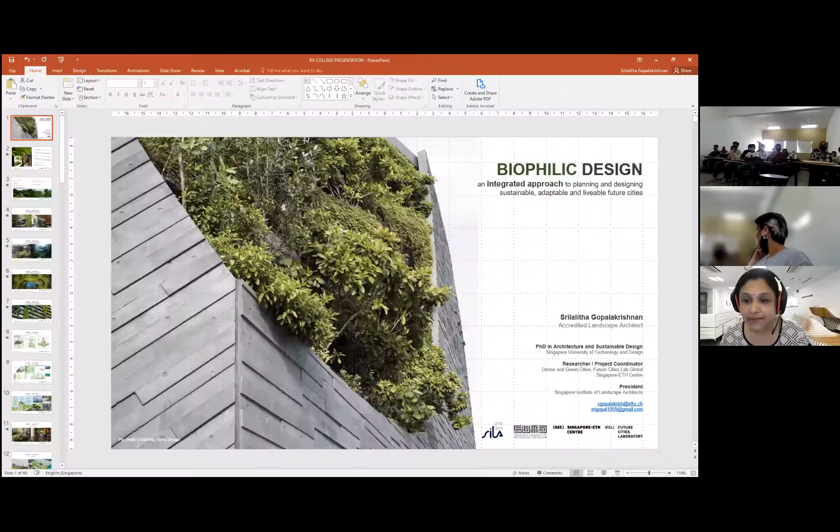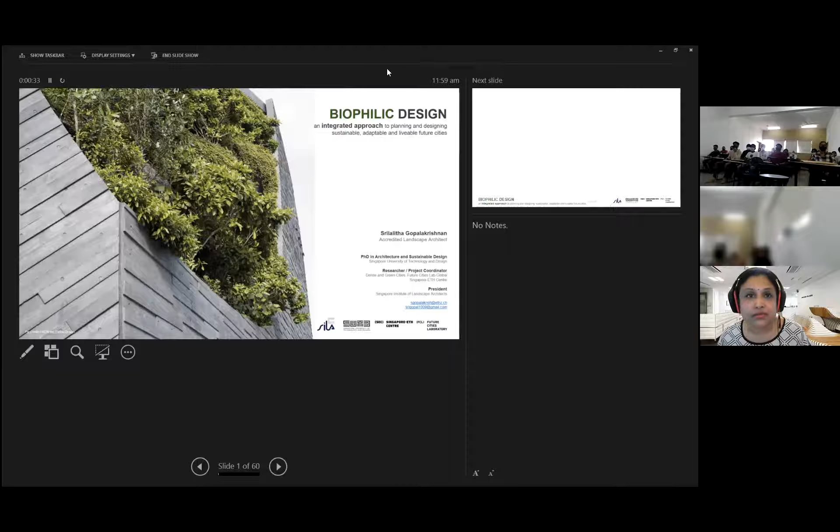Let me just start sharing my screen first and then I can continue. Can you all see my screen? Yeah, okay. So yeah, she's kind of generously introduced me. I've been doing a bit of here and there, delving into projects as well as research. So it's not a slideshow, right? It's something I can control myself, right? Yeah, it's not just a slide. But you can see the full screen on your own screen, or? We see the notes. Wait, let me change the display setting. Okay, I think I know why. It's my extended screen. Is it okay now? Yes.

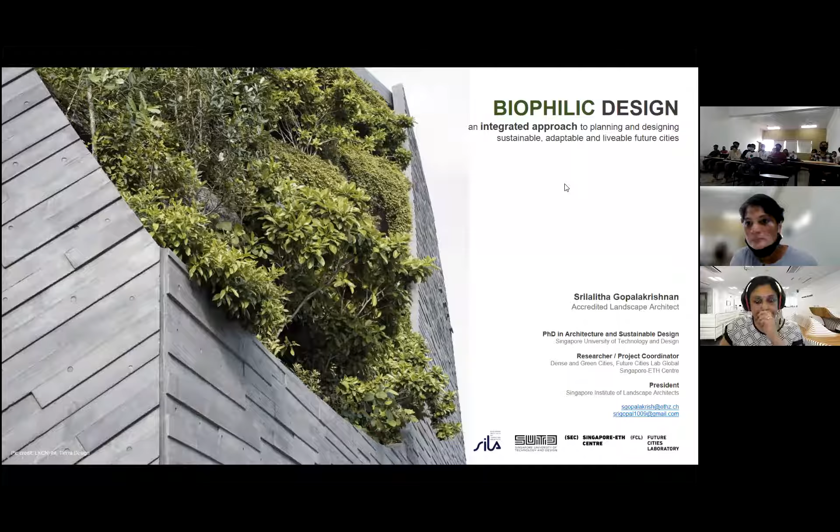Okay. So I understand from Mahalakshmi that you all are working on a design studio which is focusing on biophilic designs. The topic of biophilic design is something which I am very familiar with, and it's also something very close to where I'm practicing and where I'm settled now, which is Singapore. So today I don't plan to bore you guys with a lot of theory. My idea is to maybe just have a nice photographic journey of different projects, of what people have done, how we have approached some of these ideas of biophilic design. And I hope that you are able to get some ideas from these visuals, which could then be integrated into your own design studio problem, right?

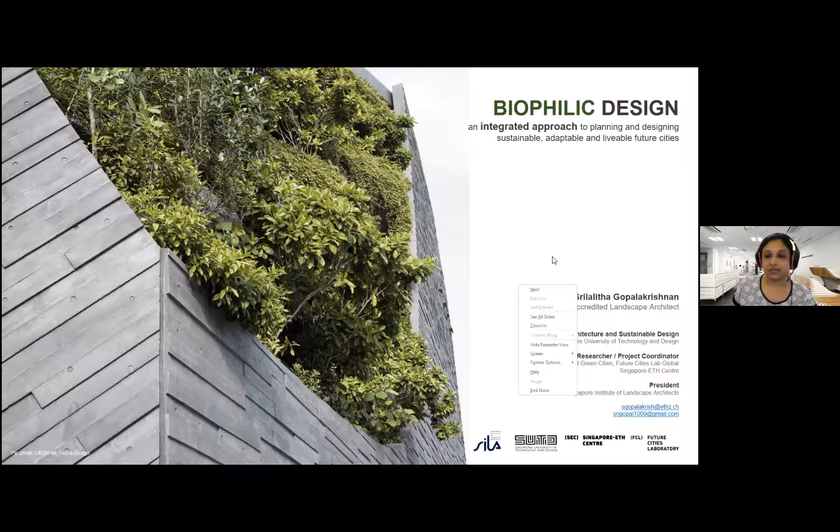Okay, so let me now get into the actual. Why isn't it moving? Okay, so I know you all must have been lectured by all your studio leads on what is biophilic design, right? So let's just do a quick recap. Biophilia in itself is a hypothesis. It's not a theory. It's a hypothesis which proposed that we humans have this very innate instinct to connect with nature, right? That became a catchphrase, and that took the form of what we now call biophilic architecture, right? So in that, what do?

We kind of integrate nature into building spaces because we know that it brings about well-being, it brings about good health, it releases stress, and there are a lot of other health benefits to it. So that's where this whole movement started, right? Like, how do you bring nature closer to your daily life?

Now, when we talk of integrating nature, what does the term integrate mean, right? Integrate means to combine things in such a way that they become more effective. If you combine and they're not effective, it's not really integration. So in integrated design, we're talking of a more holistic approach, where the design brings together many different specialities.

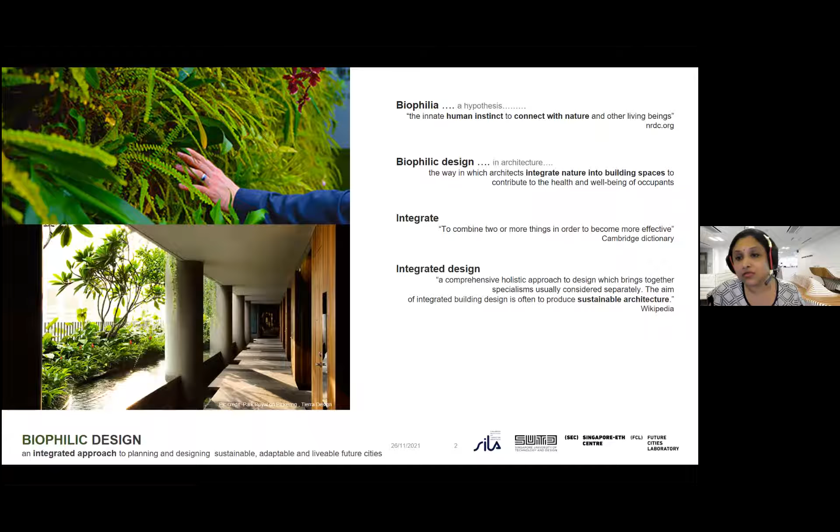And then it is able to produce something at the end of it where the sum of parts needs to be much bigger than its own parts, right? So it needs to bring about a significant change in the way the product comes to us. So in a way, we hope it becomes more sustainable, right?

So when we look at integrated design, there is, of course, intradisciplinary. That means within, say, architecture itself, you have to look at so many different aspects. Within that discipline, you have to look at many, many components which were not as important in your normal way of designing. Then there's also interdisciplinary.

That means there is knowledge which you need to leverage from other disciplines, which is not integral to architecture, right? Say it's landscape, horticulture, psychology, lighting, even bioengineering. So all these are disciplines which are not within architecture, but it's something which you have to collaborate on. So it becomes intra as well as interdisciplinary.

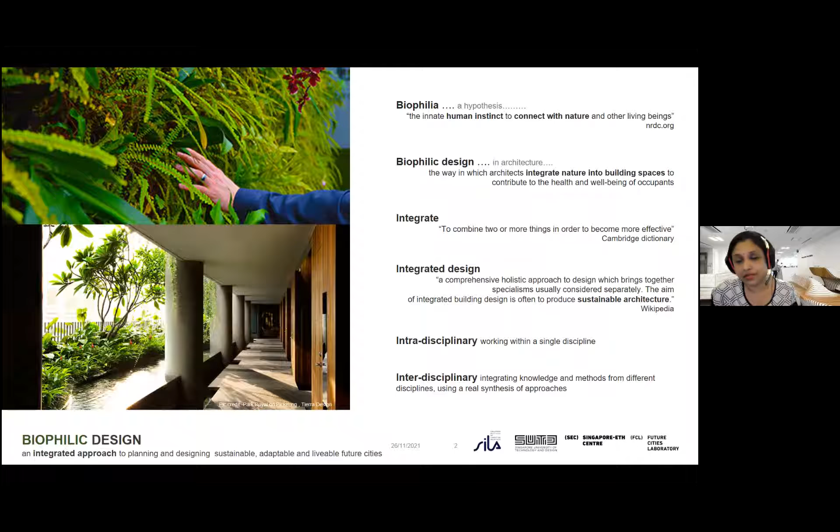So all these become important when you're looking at something called biophilia, because you're connecting with nature in many, many ways, right? Now, how do you then integrate nature into your living environments? So there, all these points which we talk of nature is what comes in as landscape, right? We say landscape architecture deals with designing spaces with the natural elements in balance. So in a way, we are looking at a landscape and architecture integrated approach. That is really addressing the spatial integration of nature into your buildings.

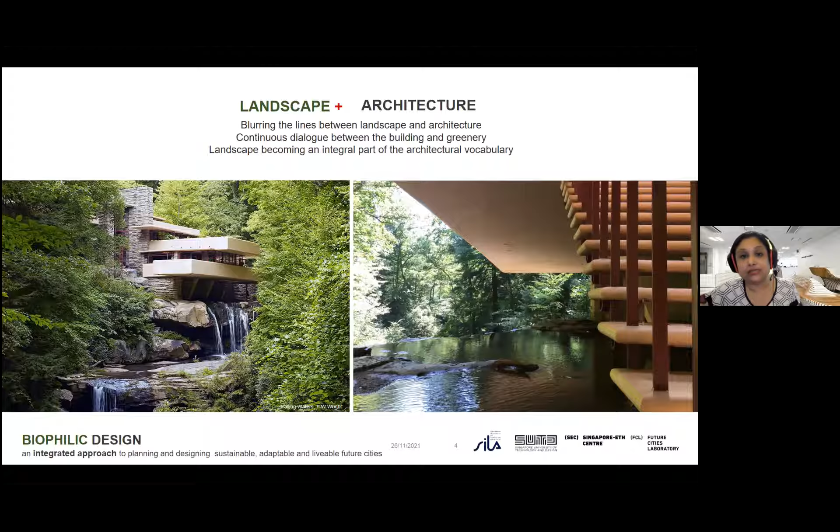Again, it's not new. We are not reinventing the wheel. It's been done ages back. It's always been there. So I'm sure you all are familiar with this project. It's Falling Water. Personally for me, my first introduction to what integrated design looks like was Falling Water, where actually you can't draw a line to say where the building starts and where nature begins, right?

Another very personal favorite of mine is Geoffrey Bawa. All his projects have also been exemplary cases where nature kind of takes over architecture. So the architecture is understated and the nature takes prominence.

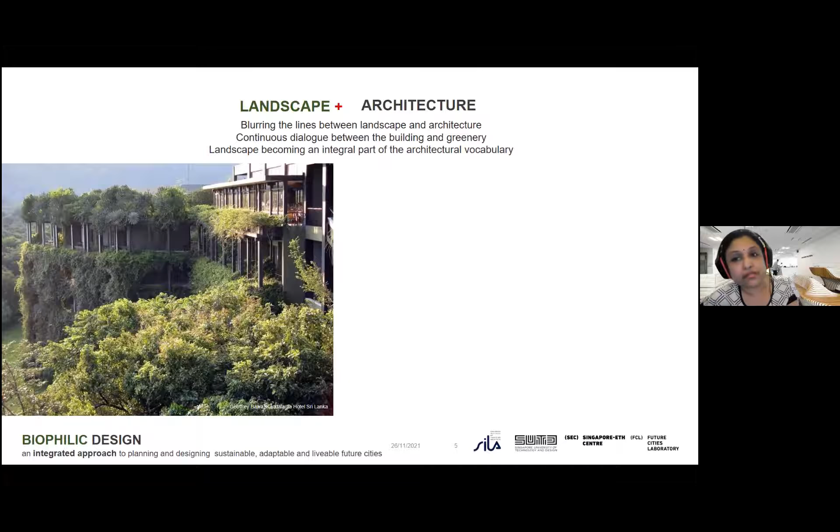A more contemporary version, who's also one of my personal favorites, is Kerry Hill. If you don't know, please do Google him and look at his work. He is one of the very well-known architects in Singapore, and some of his works are really beautiful. So this is one of the projects in Langkawi, Malaysia. It's the Datai resort. I think it was also awarded the Aga Khan Award for its conservation and the approach. So as you can see here, the building exists, but it doesn't take over nature.

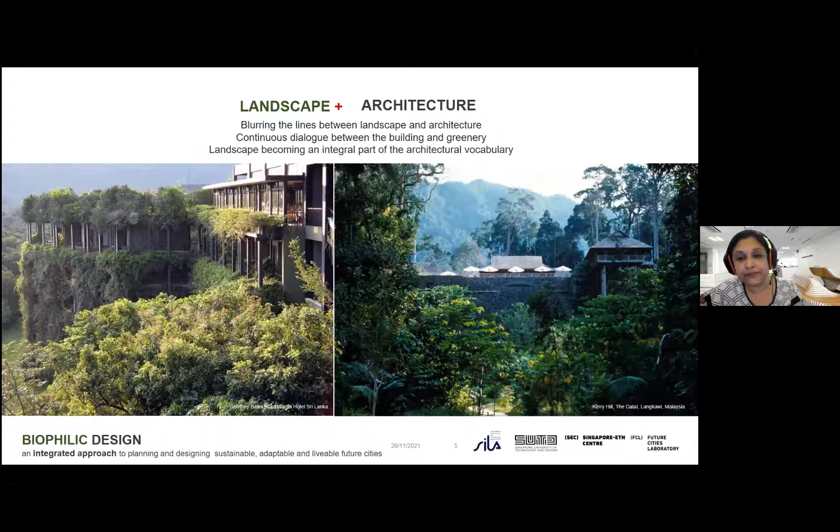Now, it's all nice when you have a setting like this, right? You have these beautiful mountains, you have these resorts and forests, and then you put a building in there. But what happens when you are in a very built, dense urban city, and then you have to create the same feeling, right? Is it possible? I think it is. So this building, I'm sure all of you are familiar with. You will also see a lot of visuals of this building in this presentation.

This is a very, very urban business hotel in Singapore, in the heart of the business district. If I don't tell you this, you would imagine this is somewhere in a beautiful location in Bali or Hawaii or something. So what I'm trying to tell you is that you could still bring the same feel into the urban city, into the urban environments which we all are more familiar with.

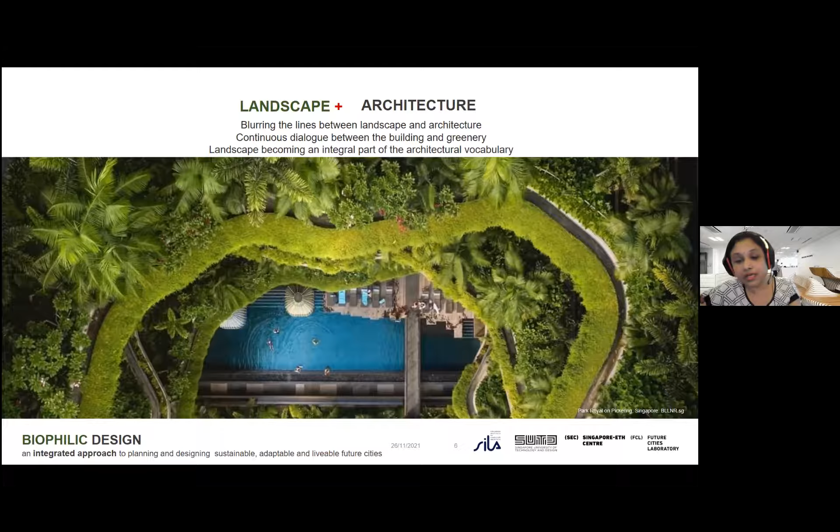Another very interesting example, I'm not sure whether you're aware of this project as well, do Google and have a look at it. It's One Central Park in Sydney by Jean Nouvel. So again, a very, very urban place. If you see the setting, it's extremely urban, but the intent has been to bring nature as close to your daily living as possible. So there are very different approaches which people have taken to engage nature with architecture. So these are some of the examples which would be interesting.

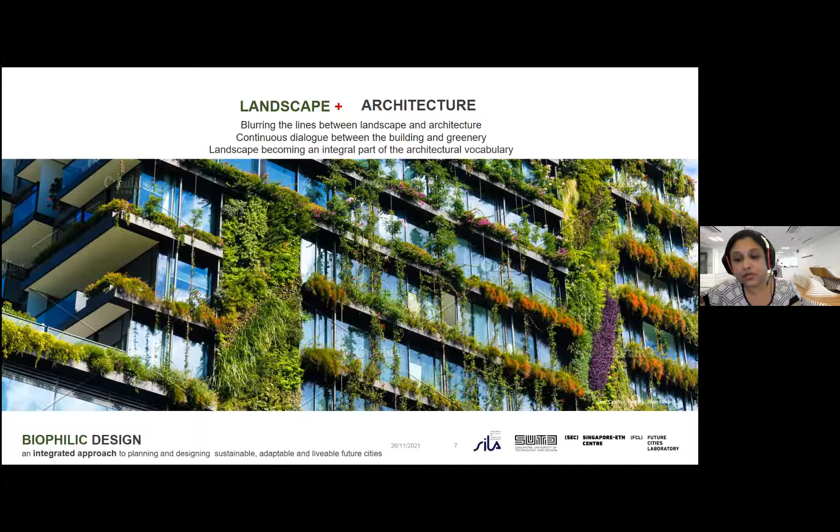Now, I come from Singapore. I am in Singapore. I practice in Singapore. So Singapore has kind of identified itself as a biophilic city in a garden. And that journey has not been overnight, because Singapore has actually focused on integrating greenery from a very long time, from its initial urban planning, even before all this talk of biophilic design and sustainable urban greenery came about. And one of the key reasons is also that the policies have aligned themselves with this idea of creating this city in a garden.

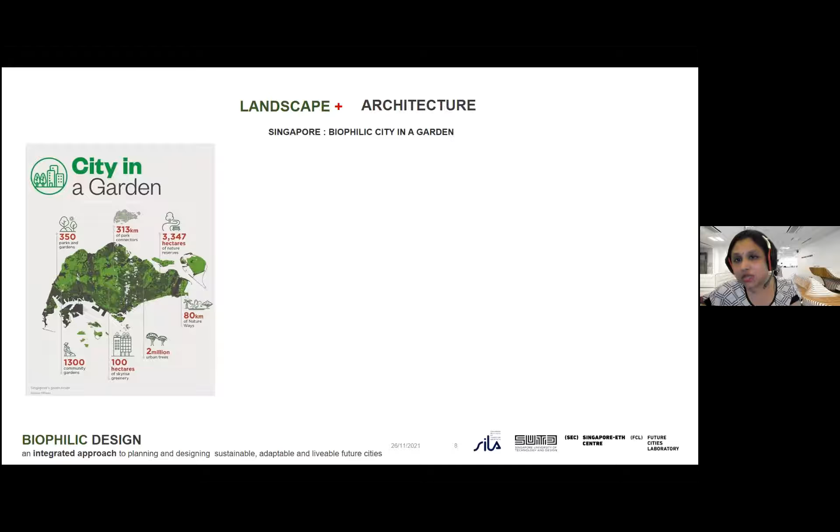So one of the most visually impactful policy changes happened in Singapore about 10 years ago, I think in about 2008, when they introduced this policy called LUSH. I'm not sure whether you all have had a chance to do your R&D on biophilic design. I saw the list has Singapore as some of your case studies. So LUSH is actually a policy called Landscaping for Urban Spaces and High-Rises.

So as you know, Singapore is very dense and we don't have space. So buildings were all kind of taking a more vertical form. So the higher you go in terms of your urban living, you are that much more detached from the ground. So how do you make sure that people still feel close to nature, or they still feel as if the gardens are at their doorstep? So that is when this whole idea of skyrise greening was introduced, to say let's bring nature closer to people's doorsteps. So what it did was it kind of created a new ground plane for urban living.

So in a way, if you're living, say, on the 30th story of a building, you don't have to come down 30 stories to the ground to enjoy your gardens. You may actually have a garden at your 28th floor, just come 2 floors down. So you kind of somehow reduce the scale and bring the ground plane higher.

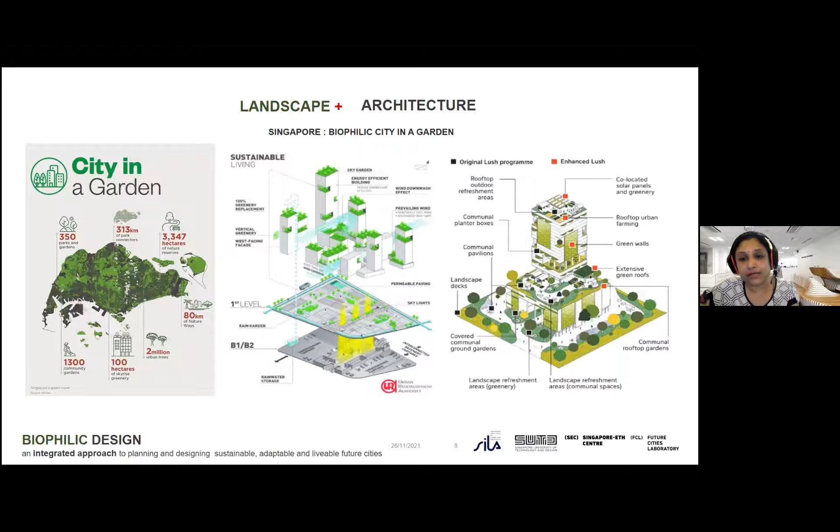So there is enough research done on what this entails. We have learned our lessons, burnt our fingers, and made changes to the way we design these new typologies of buildings, which I think we call dense and green typologies, because it's density, but we're also integrating greenery into it. So there are many guidelines which have been published. They are all available. So the reason I'm flashing this slide for you all is feel free to go and check these out. I think they have e-versions as well, if you are interested.

So it tells you a lot of guidelines on how you go about designing these. How do you make sure that the spaces you design are safe? So there are quite a few things which you can leverage on, if not for the studio, even for your own future.

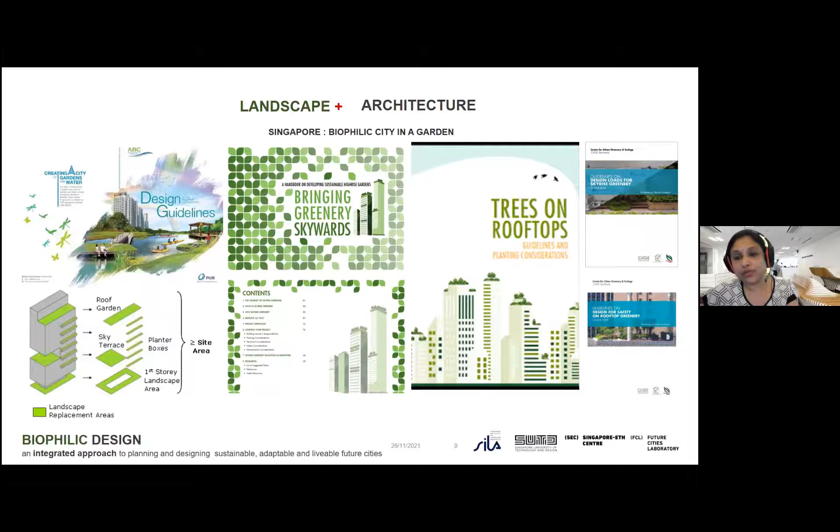So going forward, where does Singapore look at itself? The new Singapore Green Plan for 2030 really looks at making this no more a city in a garden, but a city in nature. That's a big shift which Singapore is attempting to do. City in nature entails a lot of adjustments to coexisting, right? It's no more for only people, it's for animals, it's for birds, it's for all other ecosystem services.

So in a way, where do we see ourselves? I mean, I reserve my judgment on this. We have a lot of work to do if we really want to go into being a city in nature. But these are just a sample of what you see today, because of the way the greenery weaves through the city. We see otters crossing roads. We see monitor lizards at junctions sometimes, taking the zebra crossings along with us.

Hornbills are our regular visitors. They come and sit on my balcony every day. We also sometimes have monkeys posing with us, and these are not inside some nature reserves. These are very much within the central business district of Singapore. So what it tells you is that it's possible to actually create nature within the city. It just takes a lot of consolidated efforts.

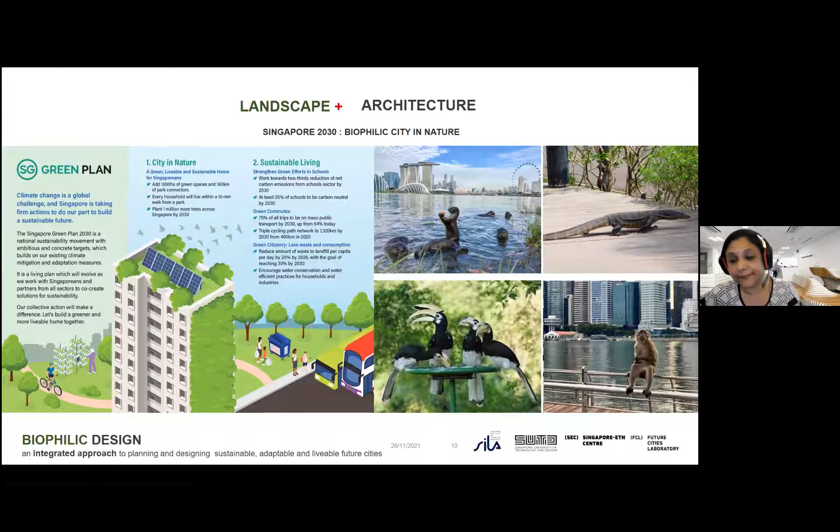So you also have spatial integration at an urban scale. This is also another project I saw on your list of case studies. It's called the Marina Barrage. The projects I'm sharing with you are all from Tierra Design, the firm I worked in. I didn't work on Marina Barrage, but Park Royal is my own project. So these are projects which we have worked on, and we've attempted to do some of the points which I'm already highlighting.

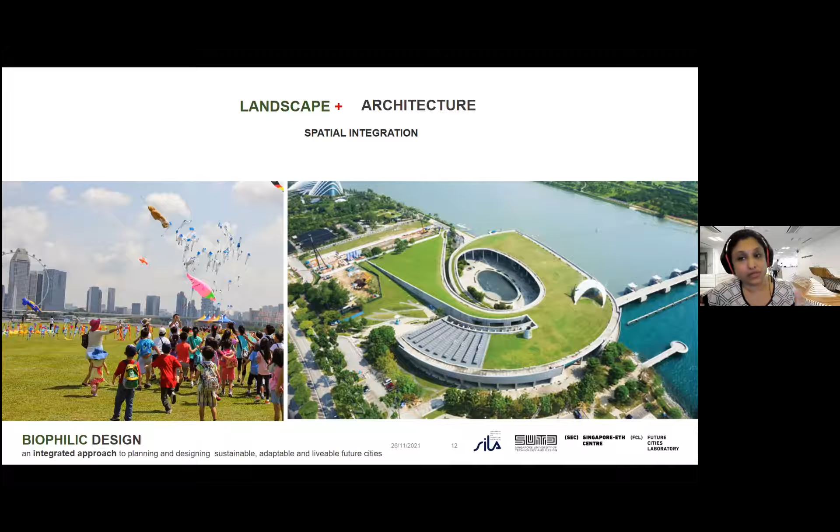Hi, Archana, any questions? You have something? No, ma'am. I have just joined. Okay, sure. So another level, as I... can I continue? Yeah. So this is Ramaswamy. This is Ramaswamy. Yes. Oh, hello. Okay. In case people don't know, that's my uncle.

Happy that you could join, and I hope your students could also get a chance to see it at some point of time. Yeah. Okay, so I'll continue.

I mentioned spatial integration. There's also something called infrastructure integration, which I spoke about as process integration, right? So these beautiful looking landscapes are not just pretty spaces, but they also function as infrastructure for your city. So they bring about water, what you call water sensitive urban design. So you use them as green-blue infrastructure.

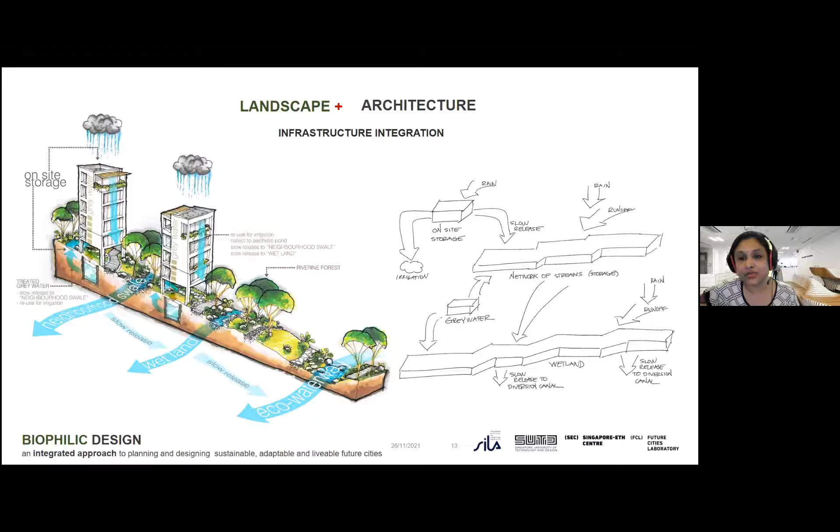An example: I studied this project in great detail, not a project which I designed, but a project which I have researched extensively. It won the World Building of the Year award in 2018, if I'm not wrong. So you can see that even in a building which is vertically integrated, you could still do the green-blue integration. So the spaces we design are not just pretty and beautiful, but they also serve a larger system contribution.

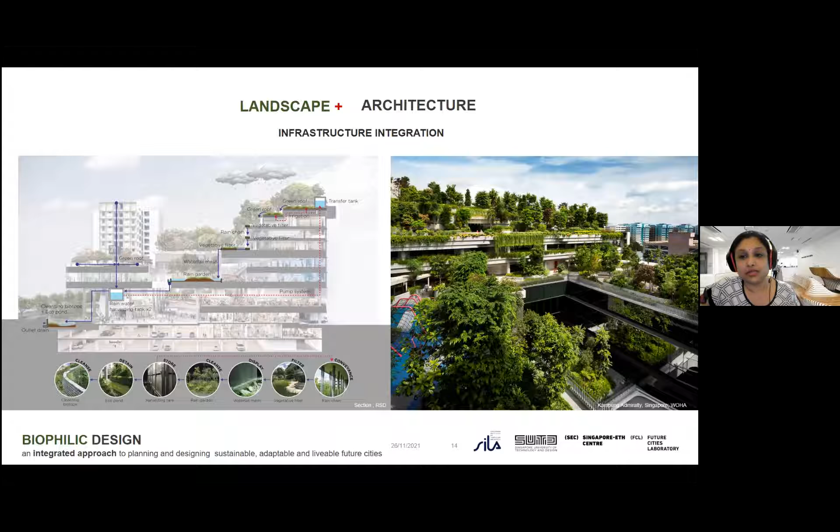Now, when we say integrated design, what are the different edges of integration? We have the horizontal plane, which is your lateral integration. Then you have your vertical plane, which is your vertical integration. So what does horizontal plane mean? Where the building sits, where the building meets the ground. So that becomes a key plane of integration.

Usually, we assume it to be on the ground, right? But as I mentioned, when we look at skyrise greening, the ground plane is not just on the ground, it could also be up in the sky. But you have horizontal integration, the place where the building meets the ground. So how do you integrate nature at that level? Options are roof gardens and sky gardens. All these are not on the ground.

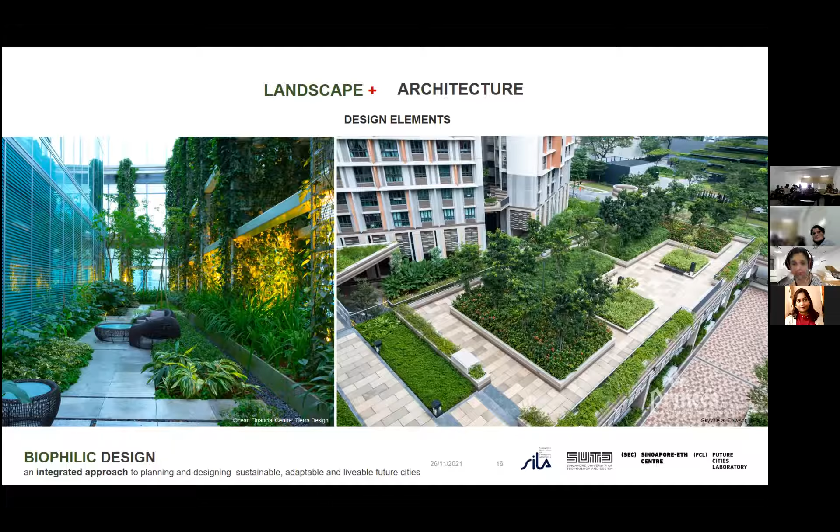The roof garden on my right is actually at the roof of a car park on the 4th story. And the left picture, if you want to guess which level this garden is, it's at the 42nd level of a building. So these are all new ground planes where the same amount of greenery could be introduced.

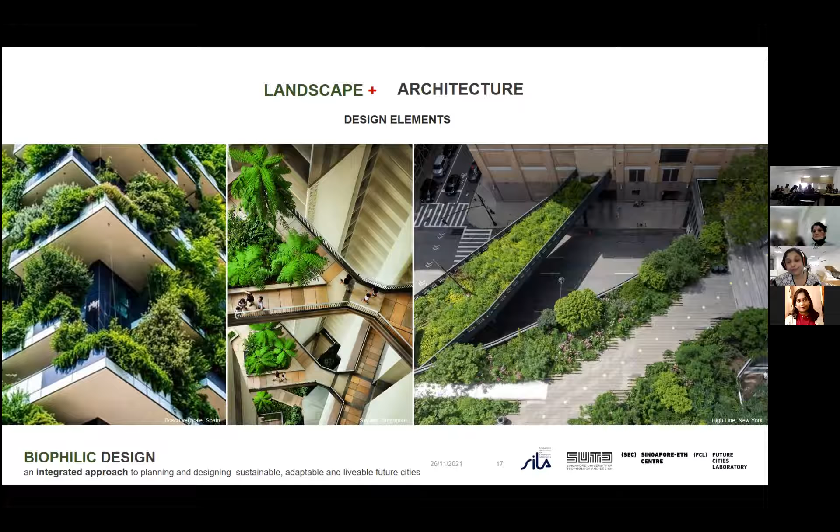Another horizontal level is your terraces, your balconies, your extended semi-open decks, bridges, connections, corridors. They all can also become elements where you can integrate greenery and nature. Even sky bridges at the urban scale. This one is a very famous project, I'm sure you all have heard about it, the High Line in New York. So at the scale of the city as well, you could integrate garden spaces into something which becomes a meaningful space.

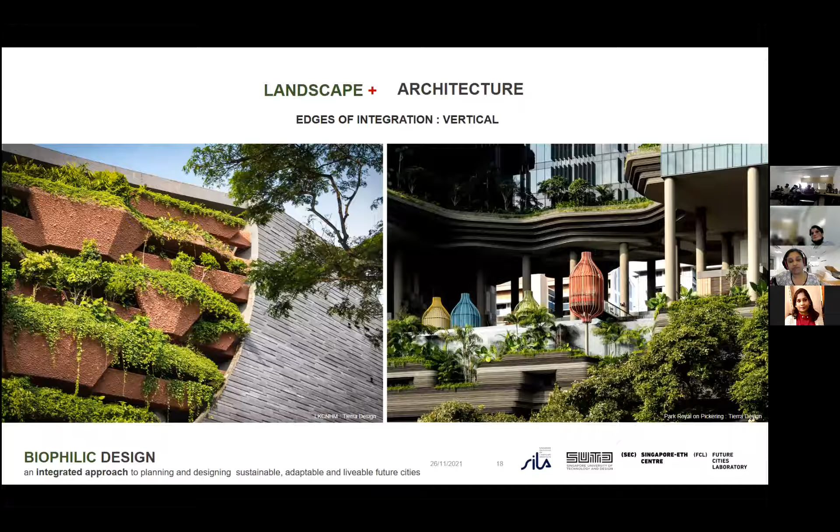The other surface is, of course, vertical. So we have the horizontal surface, then we look at the vertical surfaces. You could bring what we design on the ground into the vertical plane as well. One surface is the facade. We could literally just pick the facade and bring nature into it. What I show you are different variations of how people integrate it on facades.

It could be as a creeper, which climbs through a skin of cladding, if I may call it. If you see the difference, it's no more like a glass surface, which we are very used to; our picture of an urban CBD is just sheets of glass, right? So now you break that mold and make it into a more breathable skin. And that's where introducing nature adds more value.

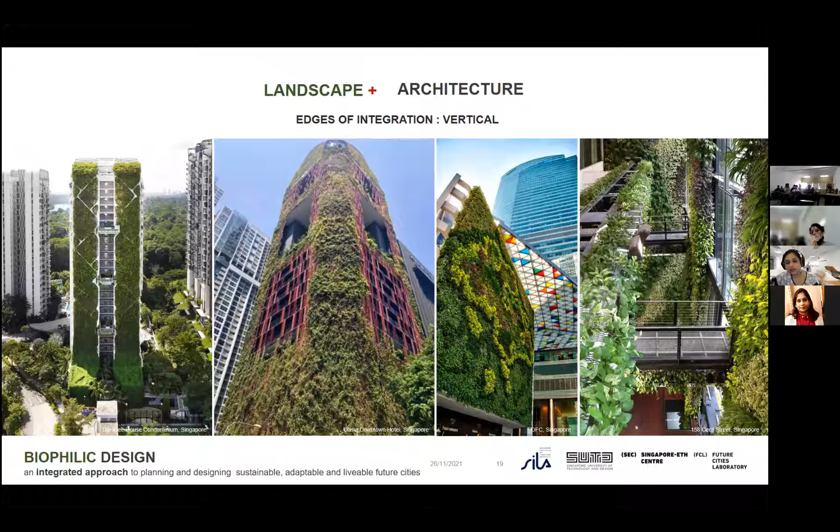It's a very well featured project. One of the first projects in Singapore which got recognized for skyrise greenery, or it's kind of refurbishing a building into something which is more biophilic. So these are projects which were my own projects, I mean, when I was working with Tierra Design.

Another edge of integration in the vertical plane is, of course, all your planter edges, hard edges. So you don't need to necessarily extend greenery all through the facade, but you can break them down into these planter edges, right? Or soft edges. So what that does is it kind of steps up the greenery, but at the same time, it softens the visual impact of how these hard buildings look like.

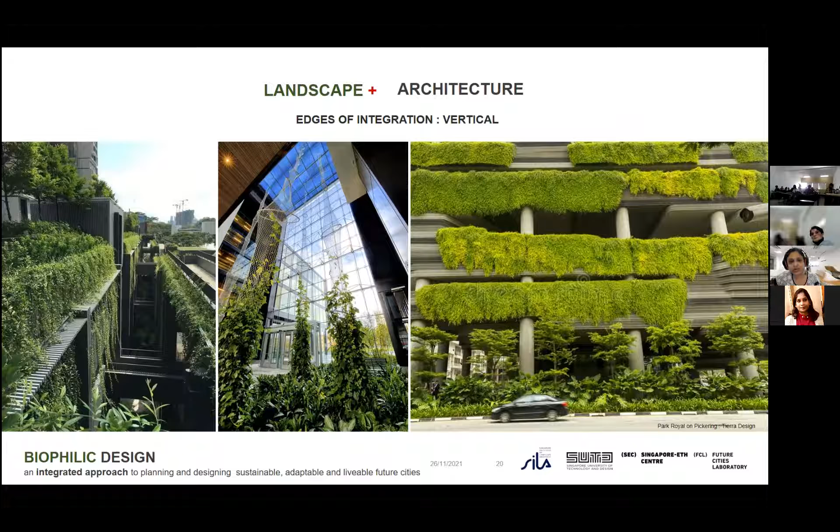It's also the green columns. You can kind of hide away the columns and use plants in a very naturalistic way. You don't need to train them on cables if you don't want to. Just let them droop down from the roof, from the edges, and create these natural screens, if you can call them.

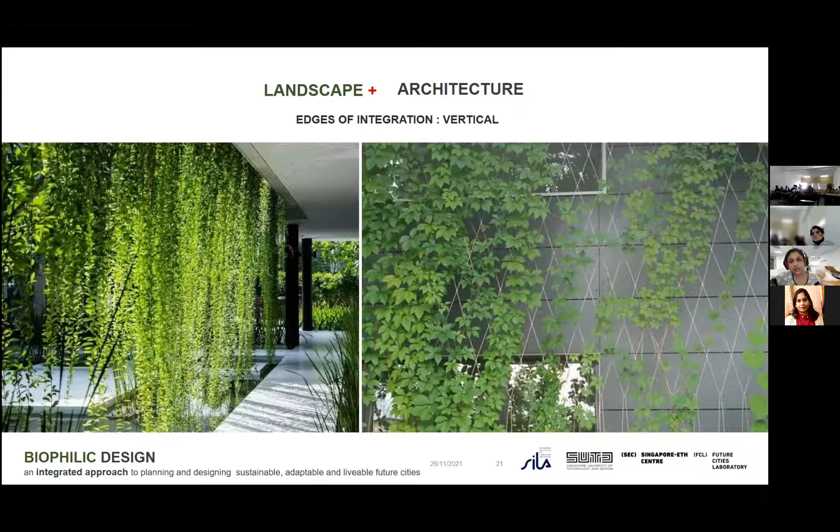Now, a combination of all of these is what kind of brings about a biophilic design, right? How projects have actually used these different planes of integration, these different modes of integration: spatial, infrastructure, vertical, horizontal. And so what I'm going to do next is take you through a range of projects where a combination of all these have been done, and you can see the effects of what they bring about at the end. So maybe these could be some ideas of how you could go about doing it for your own design project.

So the first project I want to talk about is Park Royal on Pickering. By now, I think a lot of you are already familiar with the visuals of it, with the project itself. Now, if you see, the building in itself is a very, very thin building and very long building, right? And because of its location, we couldn't dig it down and create a basement parking. So if you see the first 6 floors of this building, they are all nothing but car parks.

So how do you treat a very mundane car park facade into something that becomes a visually demanding facade, right? So that's where this whole challenge came about. How do you break down this facade? How do you soften this facade? So the architect's visual idea was to make this like a cave, right? Or something where nature kind of takes over time.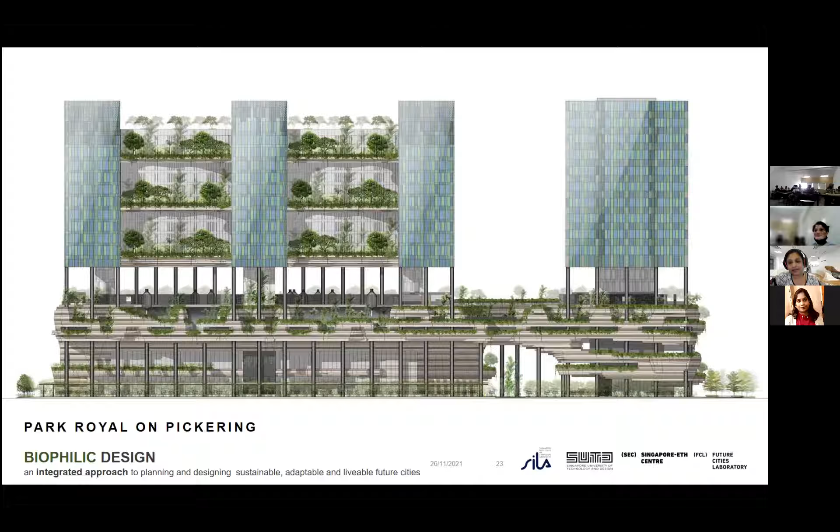Of course, it's nice as a concept, but no hotel developer wants their project to start looking like rundown, overgrown nature. So it's a very well maintained, very well curated landscape now, but the intent was to really make it look wild. So the different planes of integration, as you can see, we had to look at every opportunity, every edge which the building can offer to add the layer of greenery to it. So there were many small edges which were explored. Continuity was tried so that there is both visual and physical continuity.

And a very, very key part which we all have to remember when you design your project is the accessibility to these spaces, right, for maintenance. Because if you can't provide access to all these greenery, then they all will die off within 3 months, I can tell you. So if you see in these projects, all the planters are accessible from behind, they are safe and they are easy to maintain. So I think that's a very, very important aspect when you're designing.

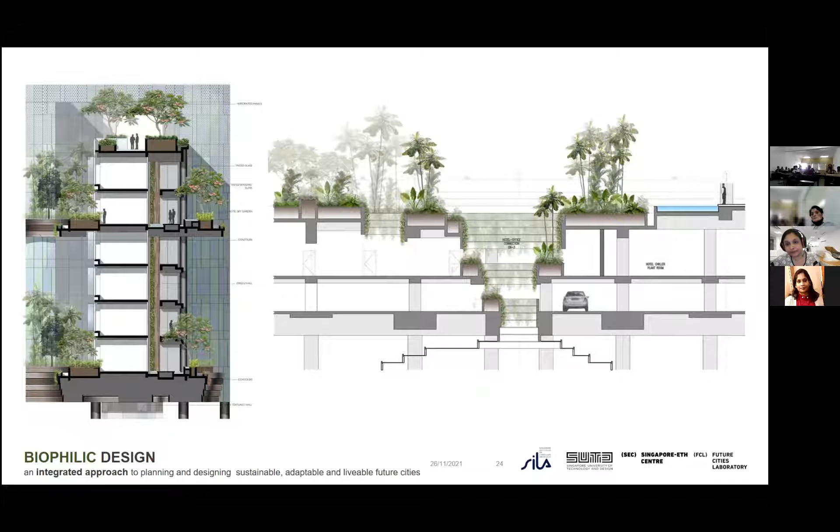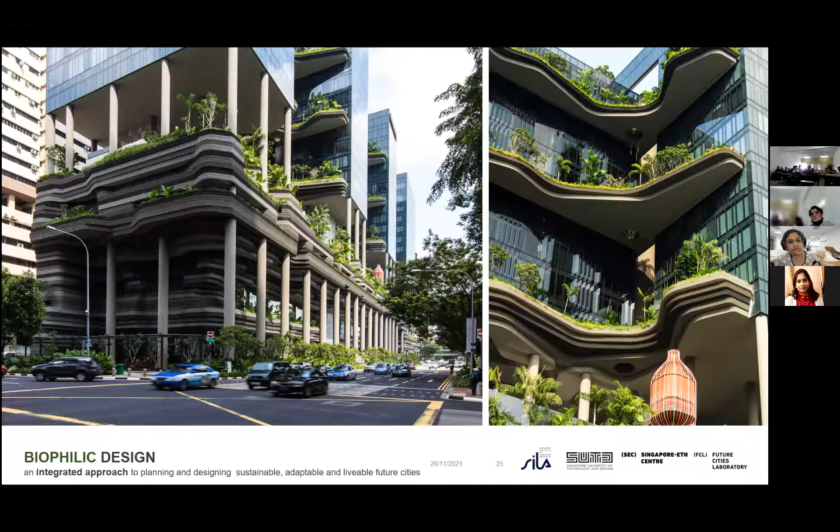So this is how it looks now. Of course, it's interesting to see how the plants keep changing as I drive through this place every day. So as you see, there is greenery which is on the outside. There's also greenery which is on the inside.

Now, the interesting part of this project is that all these so-called tiering planters which you see, none of them are accessible. They are just a visual component. So it contributes to the larger urban green impact, while for the rooms and for the individual guests, it becomes more like a feel of being inside a park.

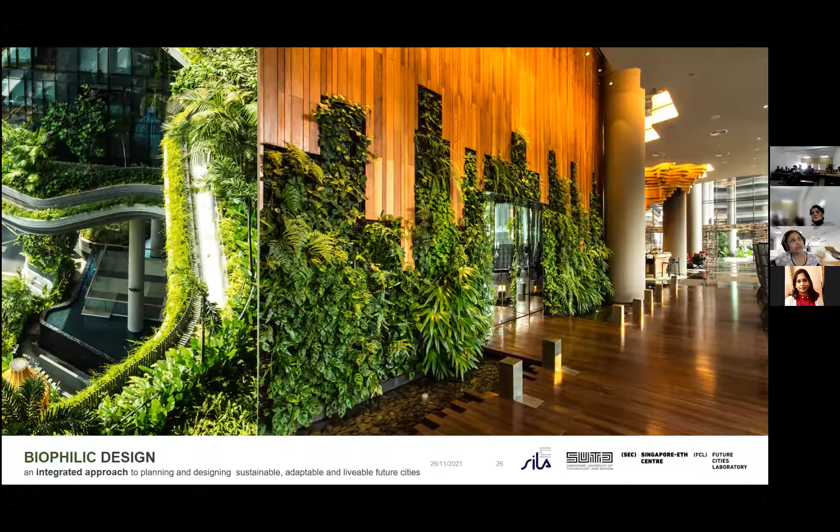Another interesting project is the Tembusu condominium. This also won the President's Design Award 2 years ago, done by the famous architecture firm called Arc Studio. If you don't know them, please do search for them. Their projects are really very, very nice. One of their award-winning projects is the Pinnacle at Duxton, which I'm sure you all would have heard of.

So this is a project which I worked on with them when I was at Tierra. So it was a first attempt where we tried to do a lot of this blue-green infrastructure integration into a private condominium. I mean, that's a challenge.

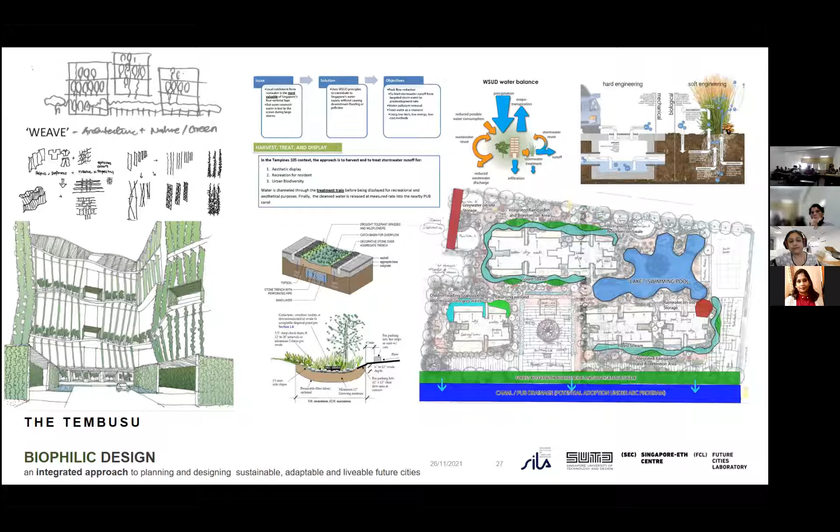I'm sure you all would understand that it's easy to do in a public project, but in a private condominium, expecting the residents to pay and maintain this was something which we took on as a challenge. And this is how it looks now. It actually is built the way it was designed.

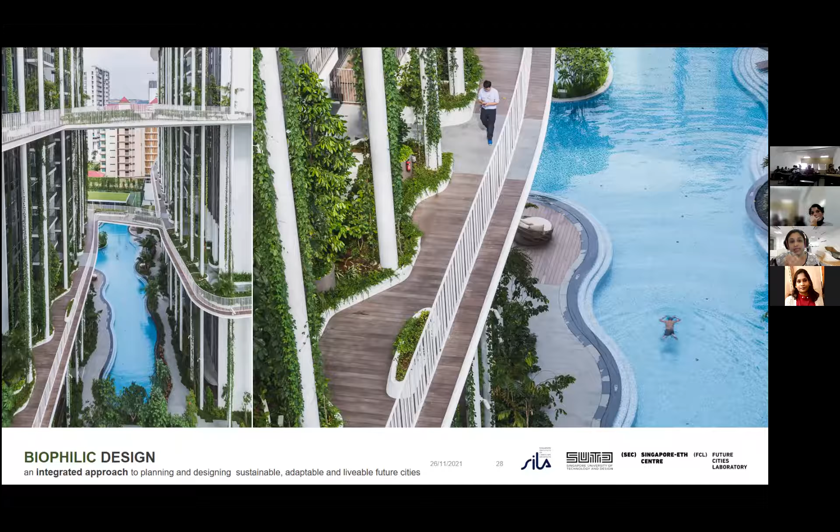The greenery stretches not just one floor. Actually, it goes up to, I think, every module is about 6 floors. There are bridges connecting. All the green-blue infrastructure integration at the ground level was actually built. You could see the water features are not just visual elements, but they also contribute to the bioengineering methods of filtering and cleaning the rainwater before it gets discharged into the public utilities.

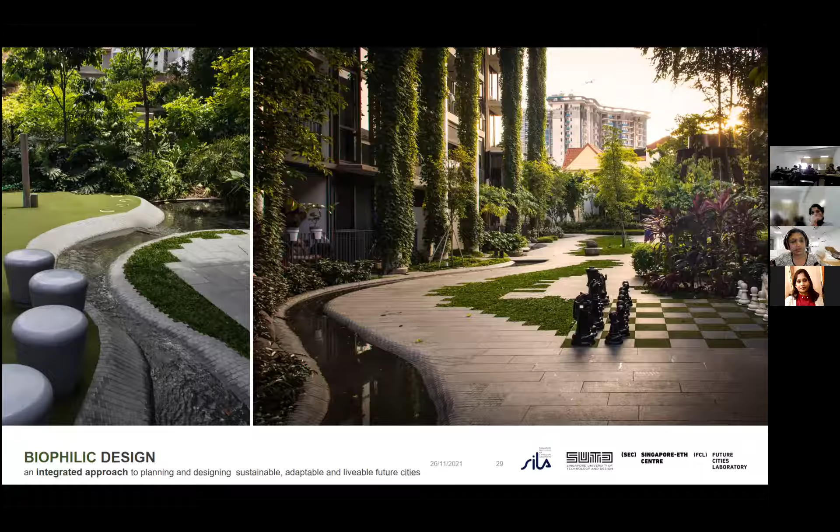Another very close project of mine is the Lee Kong Chian Natural History Museum. Now, this museum was also another interesting challenge because my clients were not laymen. They were scientists who know the plants and biodiversity way more than I can even think of knowing. So you had to really work together with them to build what they wanted to showcase as a museum of biodiversity. So here again, the space was very small.

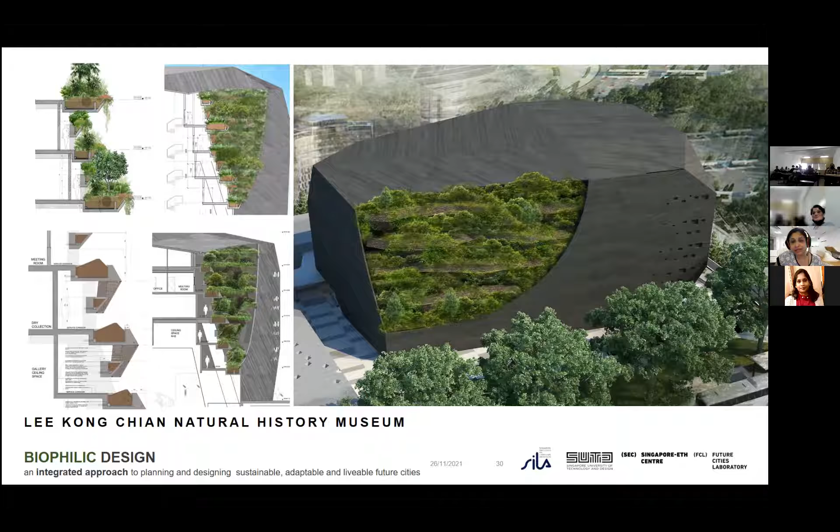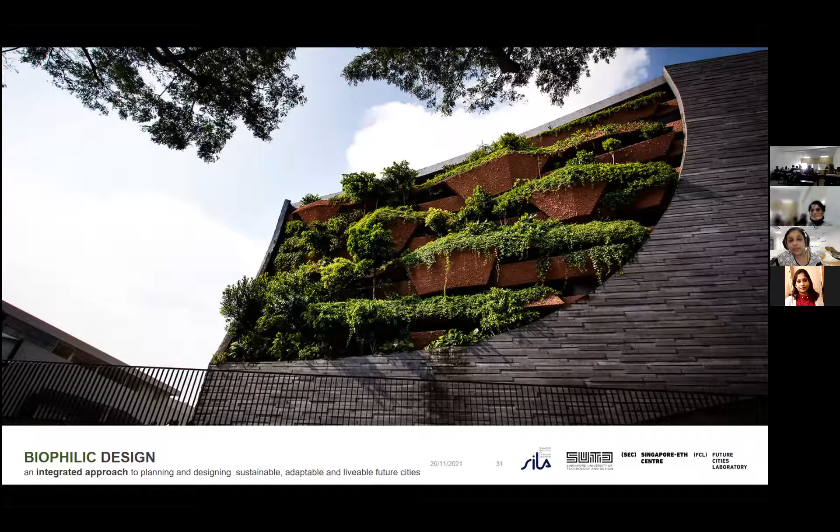So this was the visuals which we had imagined when we were designing, some of the graphics which we presented to the client, and some of the pressure which was put on us to say, you are showing me something, do you see that I can get this at the end of the project? And this is how it looks now. It actually is thriving very well. There's an immense amount of biodiversity. They record a lot of birds visiting these green walls.

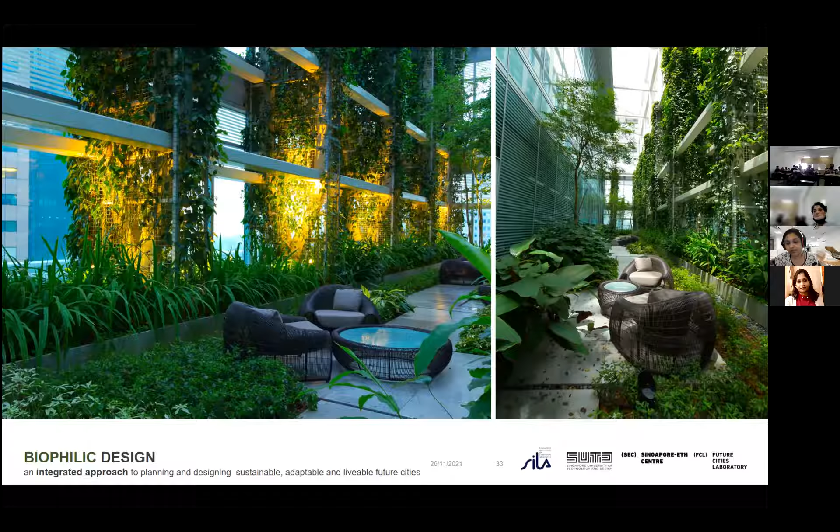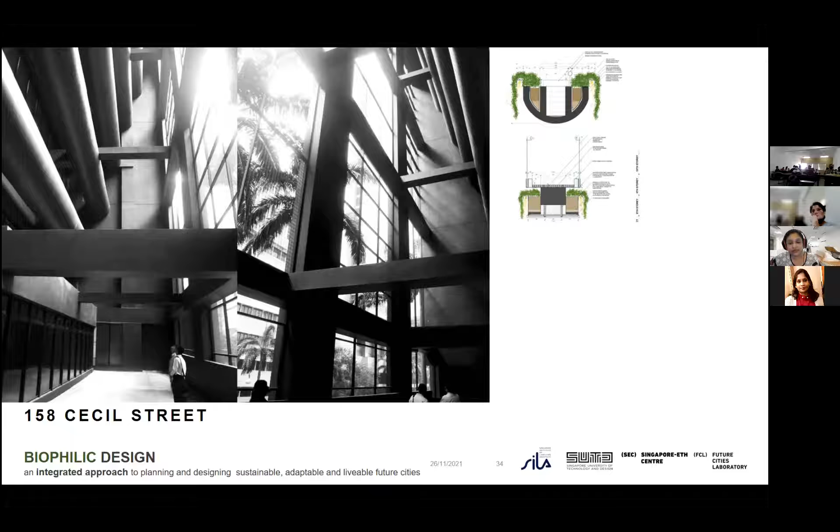And we worked with AG Facade, a facade consultant, to try and get this building transformed into something which would become desirable. So you see all these beams and columns which were there. So there were details of how we can add a layer of greenery using the existing infrastructure. So it was not about breaking it down and redoing everything, and how we could explore the possibility of adding a garden within this atrium space. So all these were the initial ideas, and this is how it looks.

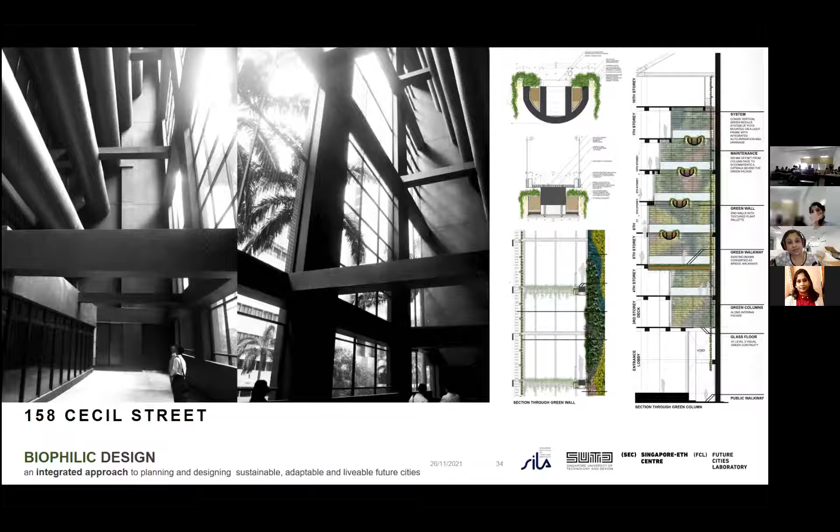So the moment it got finished, Facebook wanted to take up a space. I think all the tenants in this building are top companies, and they are paying premium, and the property owner is very happy. He doesn't think spending the money to maintain this greenery is of great significance, because it's a very marginal amount compared to what he can leverage in terms of the increased rental.

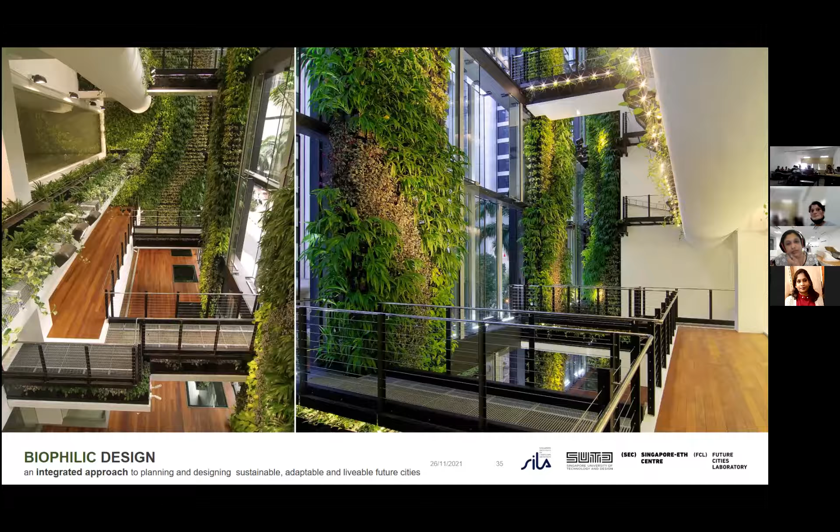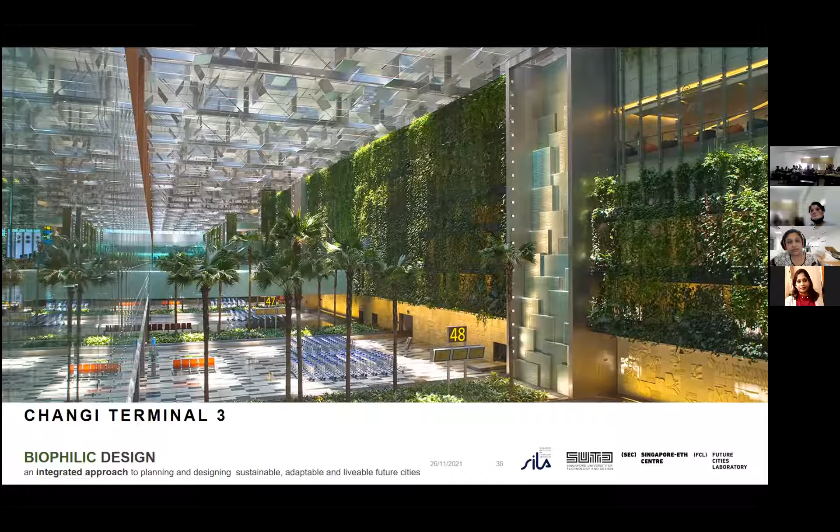Another project which at Tierra was a landmark, or in a way where we set a benchmark, was of course Terminal 3. I'm not sure if any of you have had a chance to visit Singapore. You could not have missed it, because you have to enter through Changi Airport. So this was one of the largest green walls which was done in the terminal building. Of course, after Terminal 3, Terminal 4 now has another level of greenery integration.

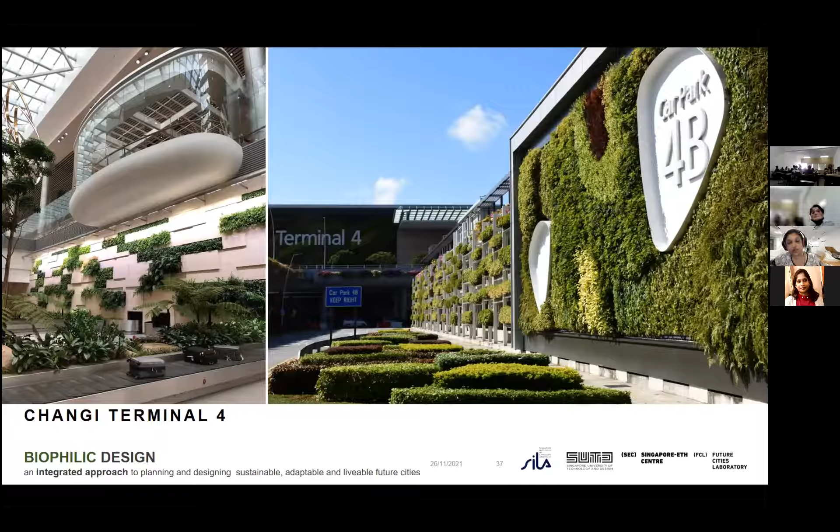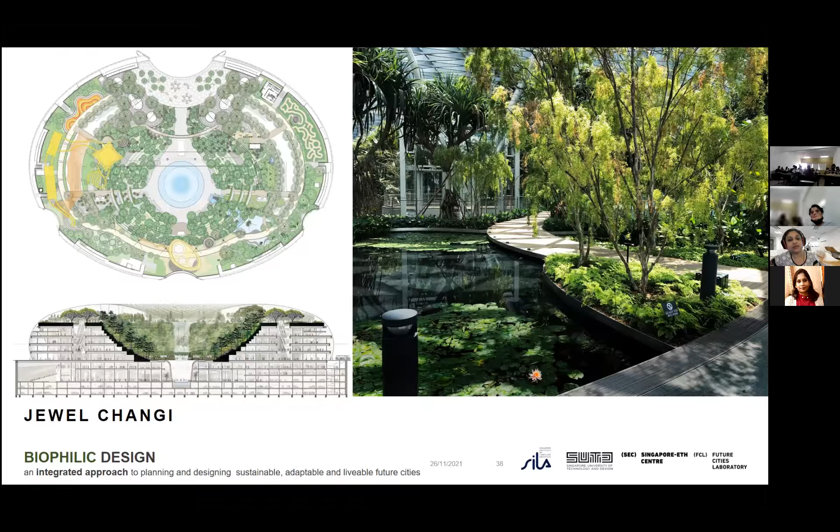And if you don't know yet, you should know about this project, which is the Jewel, which was very widely featured, done by Moshe Safdie, which takes this idea of tropical architecture, or tropical landscape integrated architecture, to a totally new level. So this is how the space looks inside. So if you ever enter Singapore, you cannot miss this building, because you have to come out through this building. It's not just airport infrastructure, it's a public space, it's a retail shopping mall, which people visit on a daily basis, or just to meet up with friends or have their dinners and lunch.

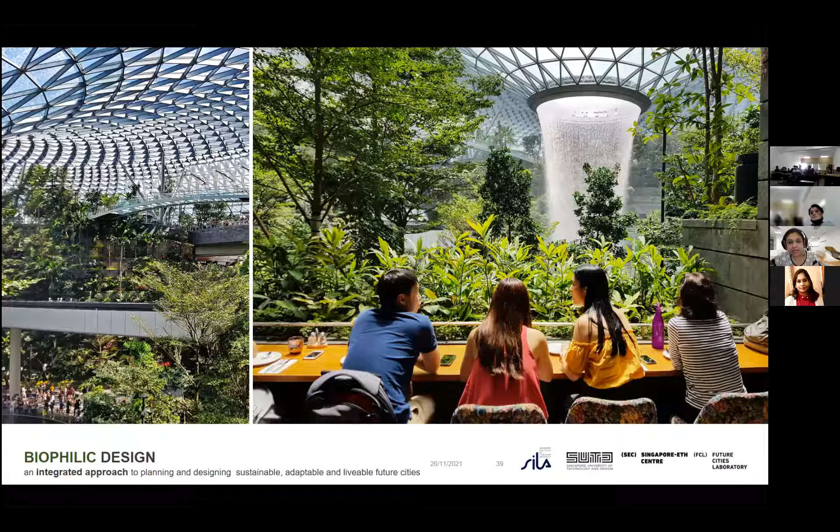Another interesting project which I thought would be good for you all to take up is this Oasis Terraces. I mean, all these projects we saw, they look very expensive, right? They feel as if they are hotels and condominiums and airports. But this is actually a project done by the public housing board in Singapore. And it's a community facility building for a very new residential neighborhood in Punggol. So it's nothing but just a group of buildings which has spaces for daily community needs. So you have food courts, some retail, supermarkets, coaching classes for kids, function rooms for people to conduct activities. So it's really a community building.

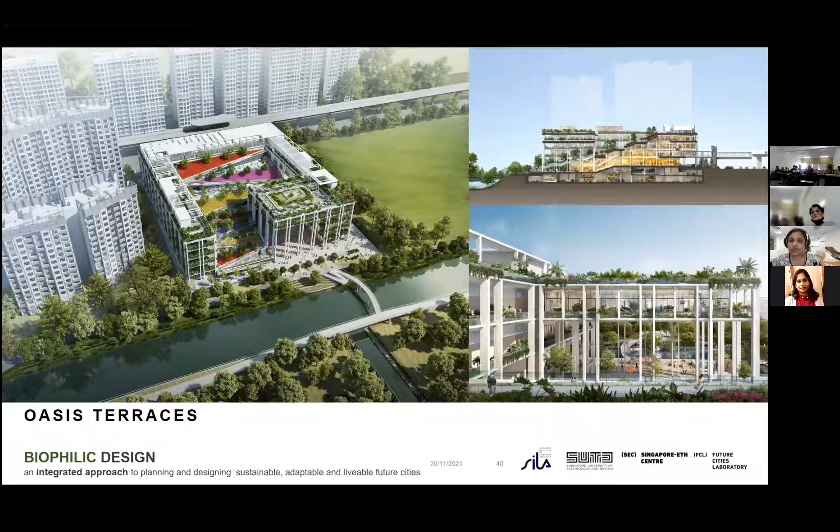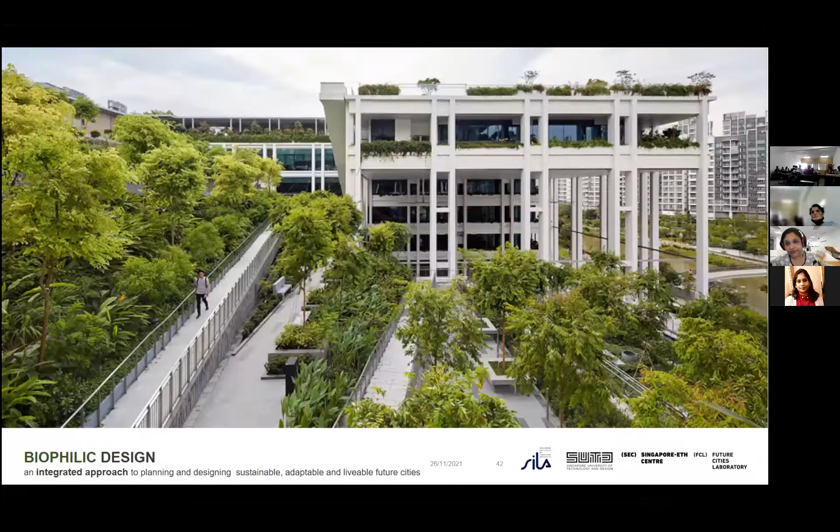And even in that building, the architect kind of stretched the idea of integrating greenery into it. So that's how the building looks now. It's really like an extended garden in its vertical dimension. Do take a look at these projects. I think all of these are very well published. The design of this was done by Serie Architects from UK, in collaboration with Multiply Architects in Singapore.

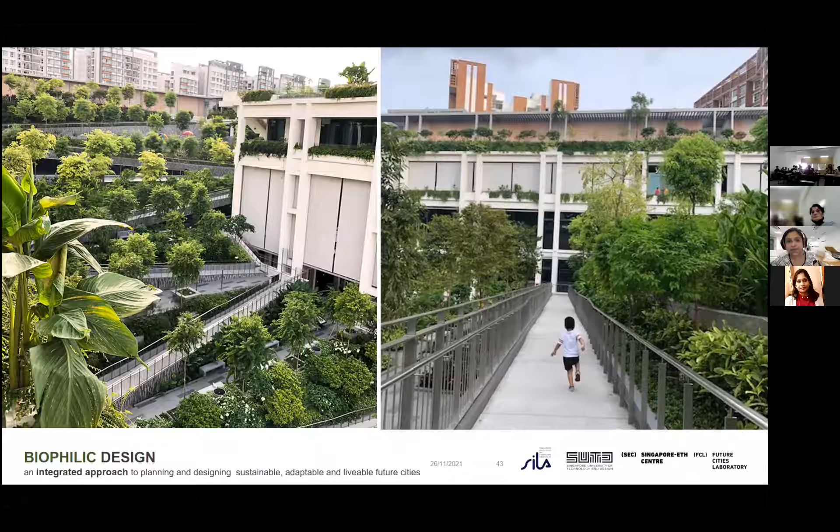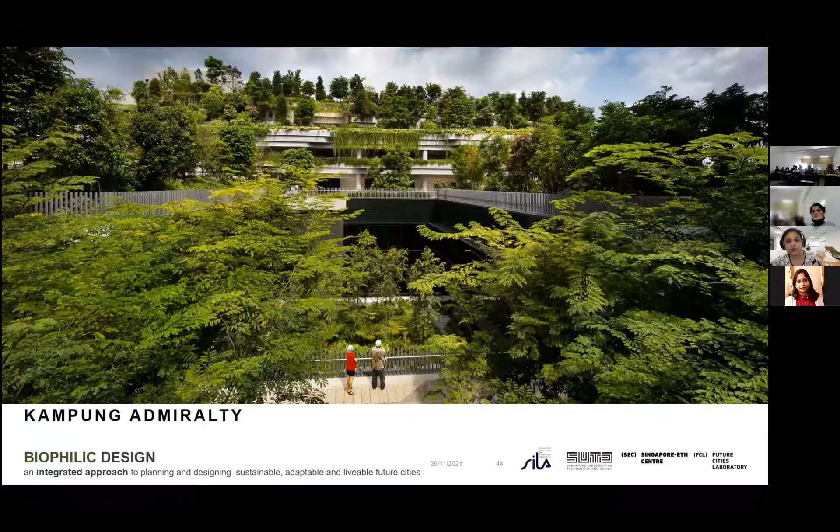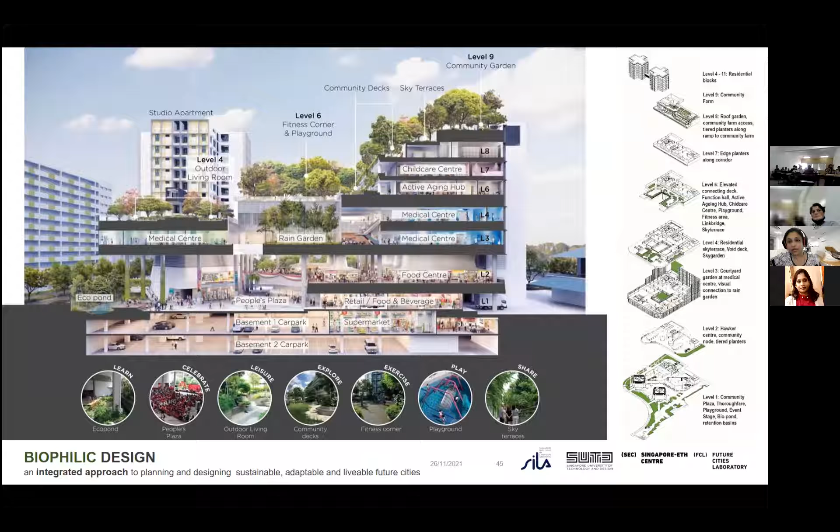And Kampung Admiralty, again, a project by WOHA, which was the World Building of the Year in 2018. A project which kind of redefines what vertical urban design can look like. So if you see, we are actually standing at level 4 of this building, and this is what you see when you look out. So it's really the idea of overlapping different land uses in the vertical dimension, but not just the land use, but also all forms of urban design like circulation, open spaces, everything was integrated in the vertical dimension.

A project which I think you all must have already extensively researched, Khoo Teck Puat. I just wanted to share it with you because it's something directly relating to your own design studio, because I think you're all designing a hospital or some kind of a healthcare facility. So in this project, it's one of the oldest projects in Singapore which redefined what biophilic design means in the field of healthcare. So it's not just for the people who visit the hospital or for the patients or the people who work there. The facility is also a very key infrastructure for the entire neighborhood.

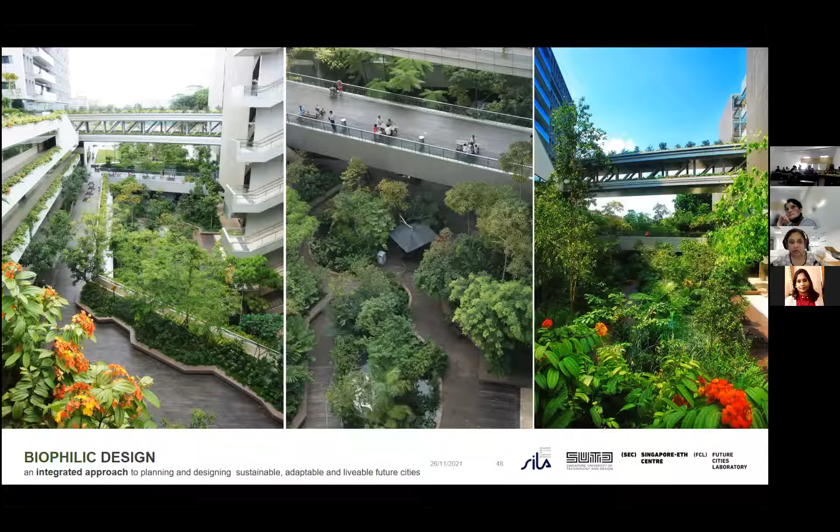So the whole hospital is actually like a thoroughfare for even the neighborhood residents. So they could all actually enjoy the garden space, not just the people who come to the hospital or who have to visit the hospital. So it's basically like stretching this into a public amenity. And you can see the people who use the roof gardens, who farm in the roof gardens in the hospital, are not hospital staff. They are residents who stay in and around Khoo Teck Puat Hospital.

They also use the gardens to have performances. They use it as treatment for some of the older patients there. The patients also tend to use the gardens for their daily activities. It's all nice, right? Sometimes we get complaints from the hospital saying patients don't want to leave the hospital because it's too nice. So they have issues of people overstaying as well.

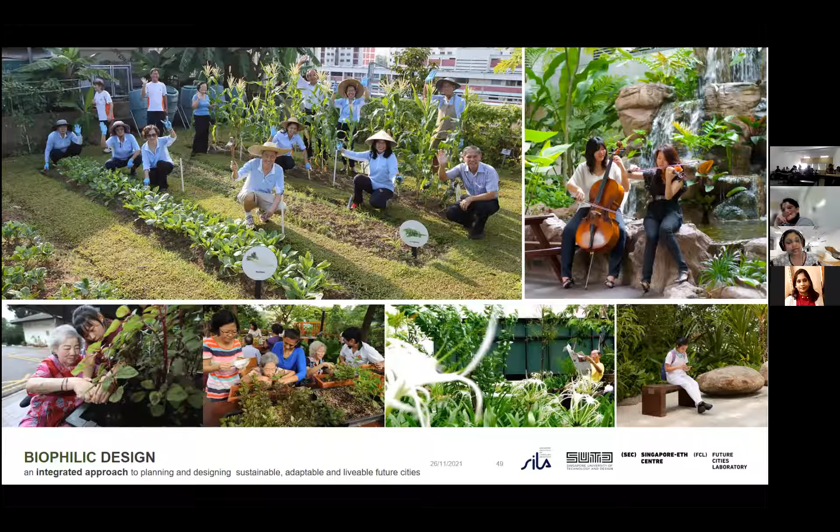Some interesting new development which you may want to also take a look at. It's another new hospital in Singapore called Yishun Community Hospital, also done by the same architects who worked on Khoo Teck Puat. I think the design is by RMJM Hong Kong. The local architects were CPG. You can also take a look at how they have gone about designing this one.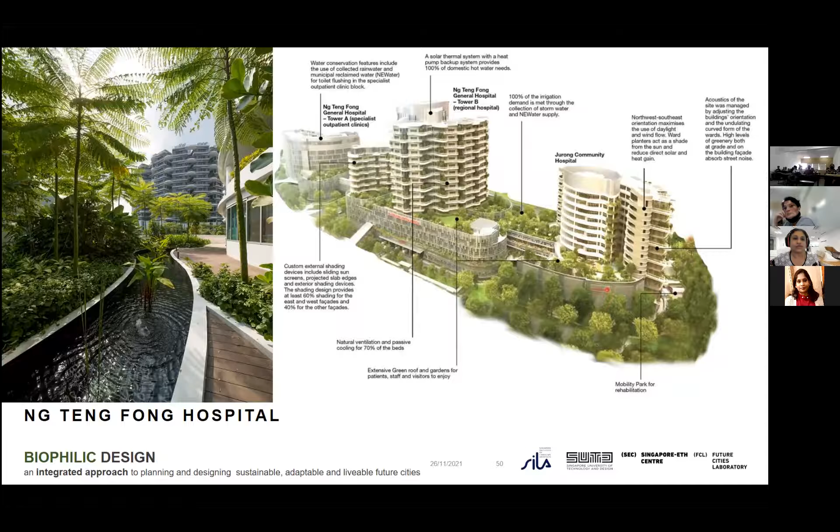It's a much smaller facility than Khoo Teck Puat, but they have tried to go about the same idea of biophilic design in a different expression. I've personally visited this and was part of the jury to judge it. I still think it needs to mature, and maybe it might take on the same language as Khoo Teck Puat.

Just to quickly delve into my other field, which is research. So we know all these kind of projects look nice, they feel nice, they work well. But what is also important is to see, are they really performing? Do they really give us the benefits which we all talk about? So that's the research which I'm involved in currently.

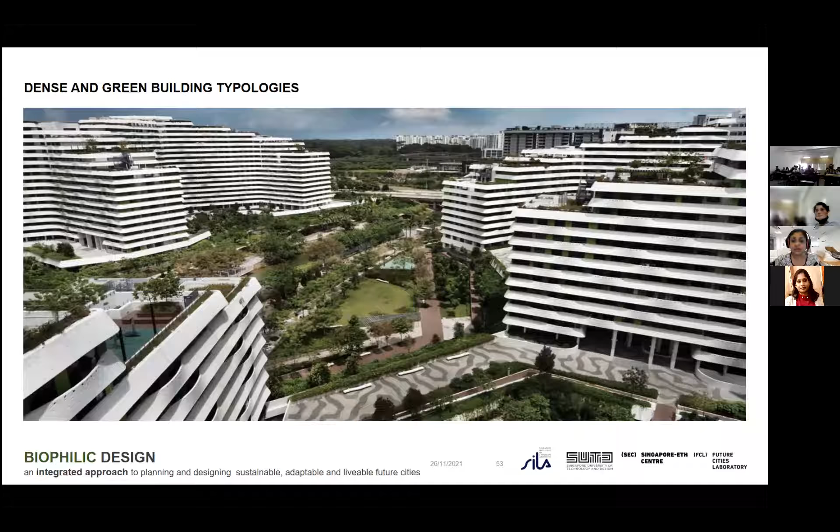So as part of the Singapore ETH Center, we did this research in 2018. It's called the Dense and Green Building Typologies. So the research actually analyzed the quantitative benefits of these dense and green building typologies to see whether they really give us architectural, urban, social, environmental, and economic gains, right? So there was an extensive study done over a span of 4 years to quantify some of the projects. Khoo Teck Puat was one of the projects in the detailed case studies.

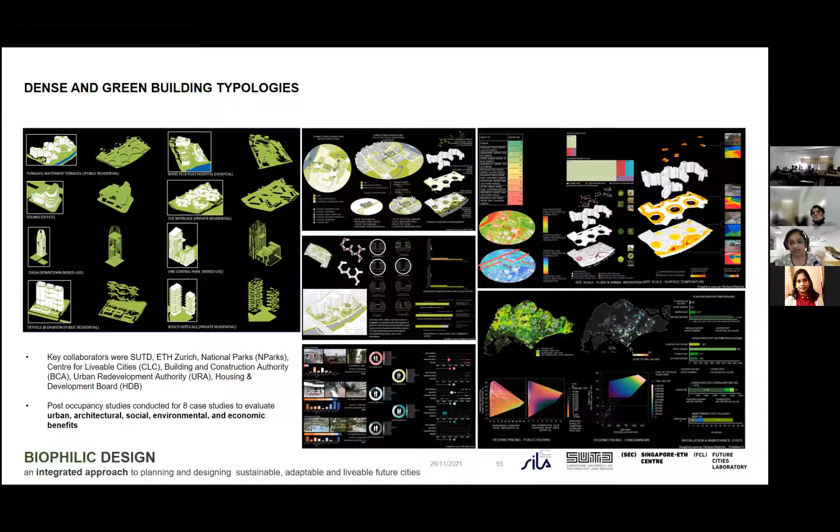So if any of you are interested, you can go and look out for this book, which published all the results of that study, as well as featured 36 more international case studies, which have shown exemplary cases of integrating greenery with architecture by very, very famous architects worldwide. I have also been a contributor for this book because I worked on the economic package of how integrating greenery benefits.

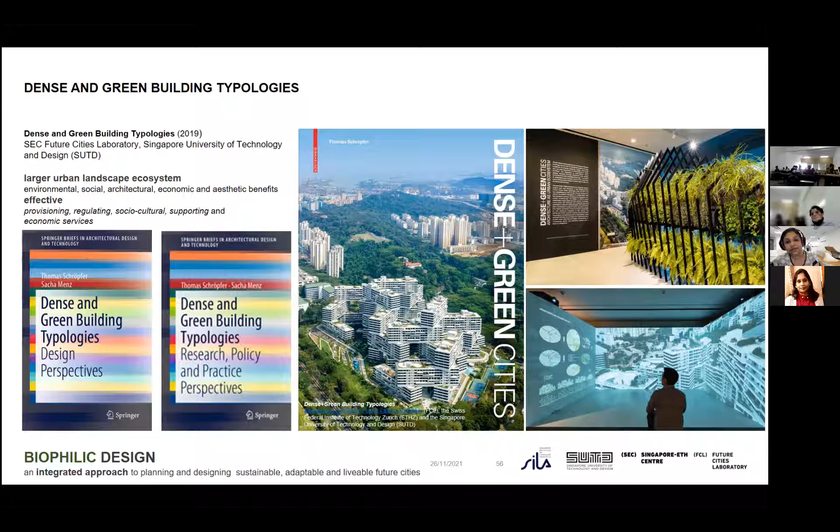As a continuation of that, we are now commencing another study, which is the dense and green cities. So the previous study was really looking at the building scale. The study concluded that the building in itself is very beneficial, but if we can extend this whole expression of dense and green design to a larger district, the benefits could actually multiply as well. So this study is really looking at how you go about designing urban districts which become dense and green. So that's a study which we're just starting on.

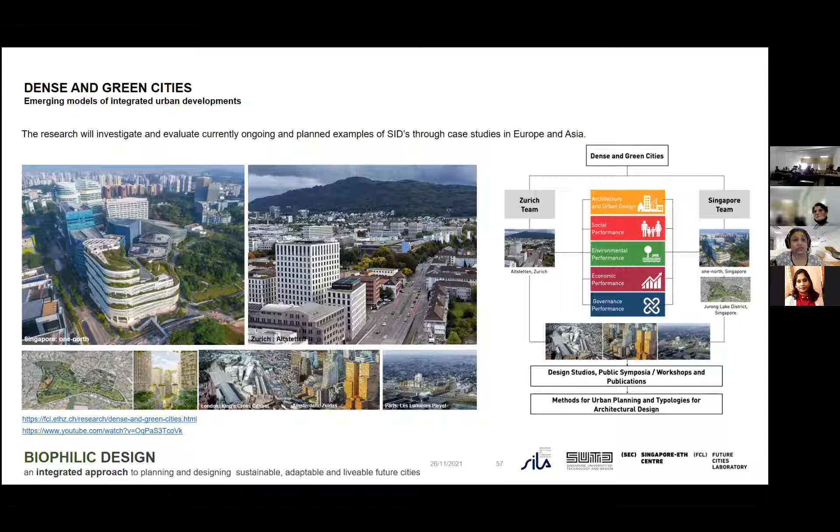Another project which we are also doing in parallel is this idea of vertical cities, which is where my PhD research was, which is on coming up with new methodologies to really analyze the spatial performance of vertically integrated landscape spaces. So we're really looking at new means of analysis. In the past, we've been using a lot of urban network studies like space syntax, maybe even traditional network analysis. In this particular project, we're exploring complexity science as a new layer of tool, which offers us various methodologies to explore spatial connectivity. So that is where this project is headed.

Again, there was a pilot done where we used Kampong Admiralty as a case study. I have given a link. You can take a look at it. It's under the Center for Livable Cities under the Ministry of National Development in Singapore. So there's more information on that and many other studies being done along the same lines to explore complexity science-based methods.